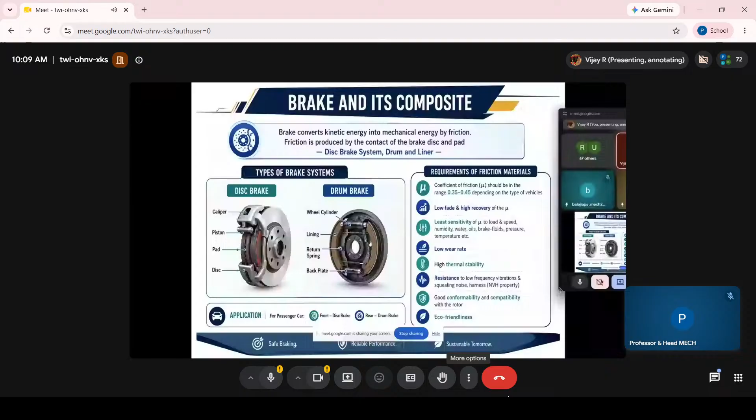Thank you sir. Global friction composite market, I was saying about, now going into the marketing point of view, maybe some guys from MBA or management will think in a different perspective whether this market will have scope in the future. Now I will come with the predictions done by Mordor Intelligence. This report is from Mordor Intelligence, where the automotive brake pad market currently is universal, that's global. We are now at USD 4.57 billion expected as the market, and by 2031, with the compounded annual growth rate, it seems to be USD 5.87 billion.

If you see the growth rate by region, mostly it is Asia Pacific where the concentration is very, very high. That is, we own more automobiles.

We often change our brake pads after service life. This travels cars and all, they will change brake pads very often because they reach the service life soon, while passenger cars we hold at home will not change very often. Maybe 1 or 2 services after that we will change, not often.

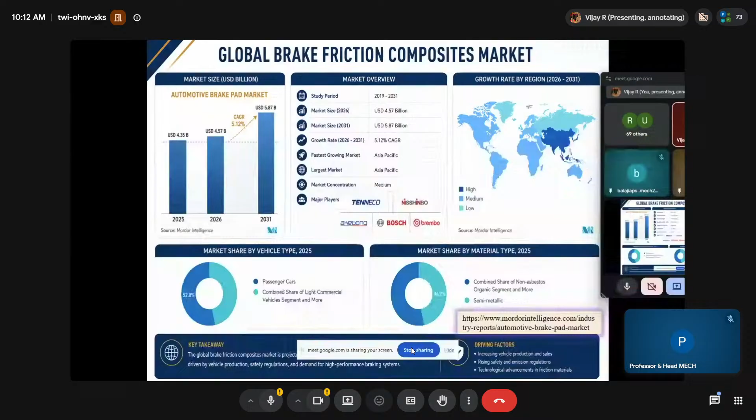This 3 to 7 is not for all the things - EV will have 3 and some will have 7, like that it varies. That 7 mg is not only brake pad, it is a combination of 3 materials. You have to wonder how 3 mg - this 3 mg, if you see, no pad, then it's going to be disc or drum, followed by tire. Tire is going to be the biggest problem for tire manufacturers, they have to focus much on wear reduction to cater to these regulations.

So, journey of brake friction materials. As I said, when Henry Ford was finding out, there were only drum brake systems. That drum brake system was previously used in our cart shafts, like we used to say, horse carts. They had a brake made of riveted leather, then cork, and some metallic strips, to stop the vehicle because the wheel rim was metallic material.

Even asbestos was used when they came up in the 1960s and 70s. Asbestos was used directly in the formation. Now we are in the current era, the 21st century, where we are mainly focused on disc brake systems and drum brake systems. Of course, I say drum is not completely gone. So in that we have 4 main categories: semi-metallic, low metallic, ceramic, and...

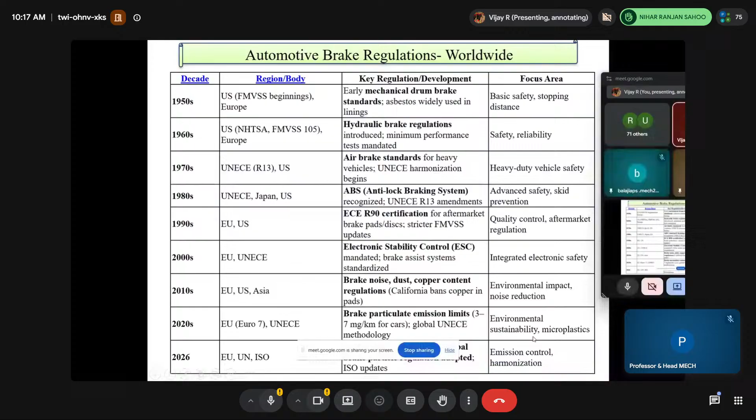In the previous slide I did not say much because the name is self-explanatory, where this was there, why lightweight, what happened, what were the problems - all was given in the previous slide. Now it is the present era we are in this thing.

Semi-metallic will have steel, iron, copper, graphite and other fillers. These fillers - what are the fillers, binders, fibers, and everything - will be given in the next slide, how it is categorized. So what it is done for, what is the purpose, where it is used, cost economically, advantages and its own properties.

Next one, as I said, to reduce the sound, we go for quieter operation with low metallic. So for low metallic, we need to have good wear and friction resistance also. That is done by this low metallic type.

Well, ceramic is for high-speed cars, but the bonding, fillers, everything will be there. It's a quieter operation. For example, we can say BMW, Audi, Porsche, and Jaguar Land Rover will have good ceramic-based brake pads. It's called elite pads. Simply put, excellent comfort and wear resistance. But if you see the cost, it will be like gold cost, thrice or 4 times higher than the pads which we are seeing.

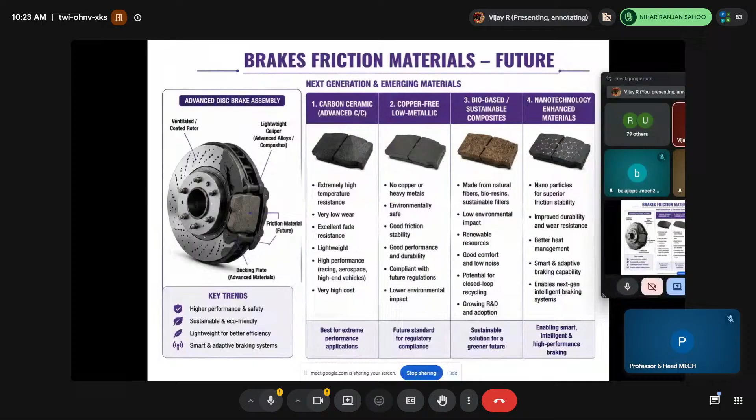Low semi-metallic, low steel with non-asbestos organic, and it will have low steel. If it's low steel, there will be metallic materials with some percentage of steel. If it's not low steel, it means they will have metallic material, but not steel - it may be some other material.

So this is the overview of the types of friction material currently available: semi-metallic, low steel, NAO, low steel and metallic, and semi-metallic ceramic. As I explained in the previous slide, this just gives the applications and where it is used.

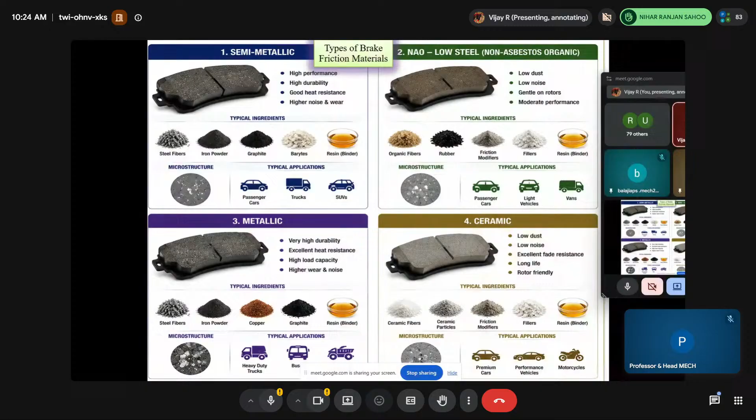So we've covered friction materials. I hope the slide is moving to brake friction composite ingredients.

Arvind sir, can you please confirm it? Yes sir, yes sir, yes sir.

Thank you. So brake friction ingredients are mainly classified under four main categories: fibers, binders, fillers, and frictional modifiers.

We all know what a fiber is. Fiber is nothing but a reinforcement to withstand the structural integrity. So our friction formulation will have 10 to 15 ingredients.

This is the formulator's strategy of what they will use. Formulation is just like a black science, we used to say, because everyone will have a different strategy to make a formulation. It's just like making coffee at Cafe Coffee Day, where the same ingredients - milk, everything - is being used.

The coffee powder or chocolate or something is common, but the person doing the combination plays a vital role. A Cafe Coffee Day at Avadi will have a slightly different taste sometimes - not much, I don't say they vary much, but slightly it may happen.

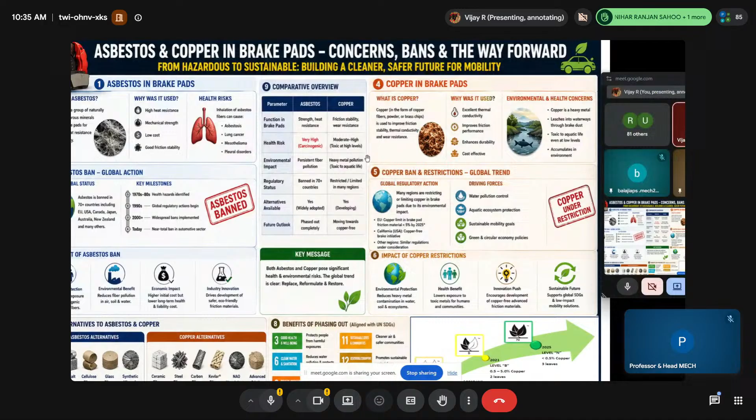They have restricted copper usage, and at the bottom you can see how the copper usage is reduced. By 2025 it should be 5%, in 2021 it's 0.5 to 5%, and by 2025 it should be less than 0.5%.

This is again a geopolitical thing we have to consider. If we look at India or Asian countries, they will use copper, saying we need copper for dissipating heat and everything. Not all, but some people do this. But European or American studies will say don't use it. It depends—there are some studies which use copper, some which restrict it, and some which eradicate the usage of copper entirely.

So copper alternatives are given here, like NAO, non-asbestos organic formulations. There's a specific formulation for it, and they change the formulation accordingly.

Next we will go to the binders. As I said, a binder is used for binding the ingredients together. One is the phenolic resin—a straight phenolic resin with some OH bonds. This is the typical composition.

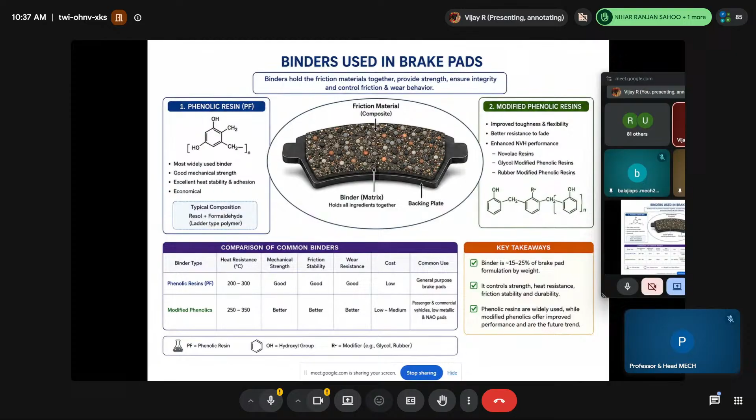There are also modified phenolic resins, like rubber modified, novolac resin, glycol modified, and epoxy modified—these are cheaper. We can't buy everything premium, like from a general store. So both straight and modified resins are used universally by formulators, depending on the application, the request, and the conditions it has to work under. It's not a single factor, it's multiple factors.

Now the future of binders—this is a research area people can focus on. The first is the evolution of the roadmap, shown at the bottom. First is phenolic resin and advanced phenolic, how it's evolving. Now engineering is putting in nanomaterials—they're planning and working on CNT, graphene, and nanoclay-based binders for higher strength formulations.

Then eco-friendly binders like CNSL-based and other recycled polymers are used. But recycled thermoplastics are not generally used in commercial automobile brake pads—they're used in some low-temperature applications and brake pads for non-automobile purposes.

Then self-healing binders and damage-sensing binders are being developed—it's a smart, intelligent binder. I'm not going too deep into this because it's mostly theoretical and not fully realized in practice yet.

Multi-phase combinations are also being explored: phenolic plus epoxy, phenolic plus rubber, epoxy plus ceramic—meaning epoxy, ceramic, and phenolic together, along with polymer and nanofillers. Multi-phase systems are in the picture, and there are many ongoing studies which can be a good pathway for future research.

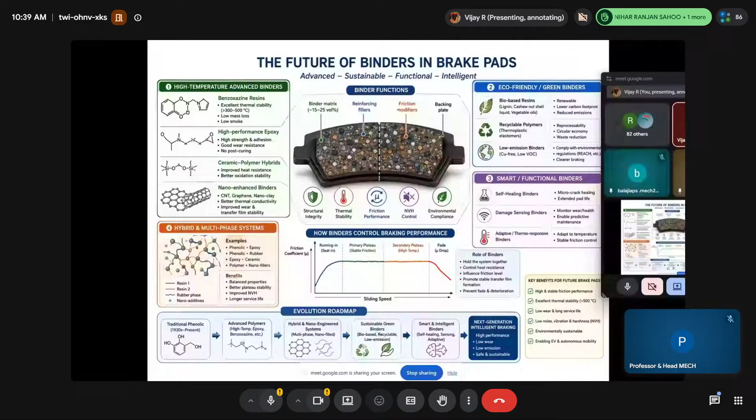Right, Dr. Arvind sir. Can anyone say where inert and functional fillers are used in brake pads, please? Yes, sir, thank you, thank you.

Abrasives and solid lubricants, as I mentioned, relate to lubrication. Some people ask if lubricant is for reducing friction. Yes, it reduces, but more importantly it stabilizes—it reduces frictional fluctuation, which is stabilizing.

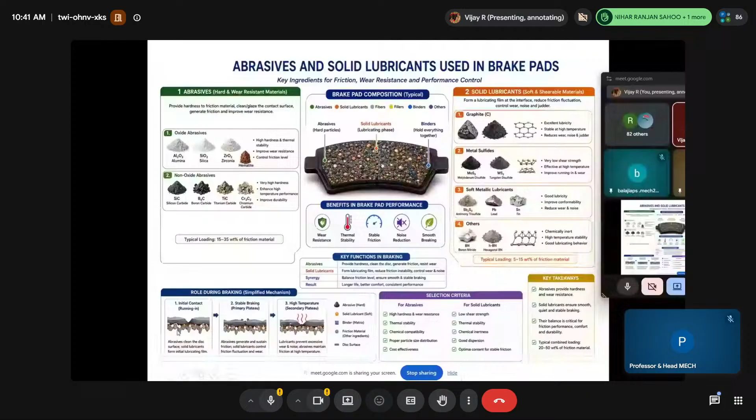So now comes the main feature of current hot topic, which is the biggest problem next to copper and asbestos. Asbestos is gone, nothing. Copper is in pathway. Now a new day has come. It's called antimony trisulfide, a geopolitically driven, health concern based, environmental concern based material.

Environmental concern, toxicity to life, heavy metal concentration. You see fishes, sometimes they say lead is affected, arsenic is affected in our fish while eating it. Our marine studies will say that. Supply chain, geopolitically, we had some issues with certain states. That was not a big concern before, but some countries would geopolitically hold this material and stop the supply chain.

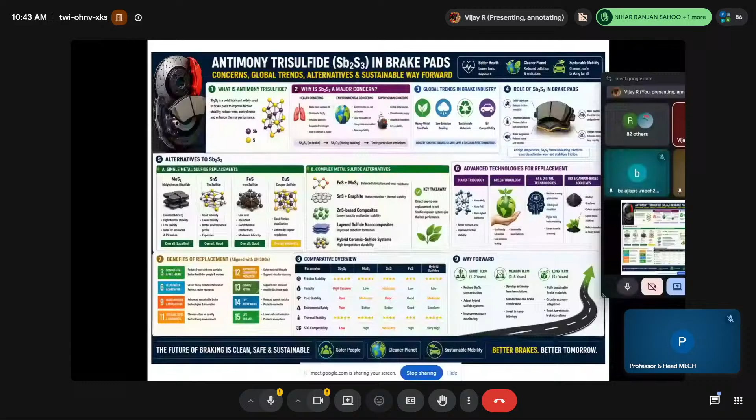So how it will align with the SDG goals is given here, because our future will be based on the SDG goals, Sustainable Development Goals of the UN. Sustainability, as I was saying previously, this is going to be the path - sustainable breakdowns, life cycle assessment, how to reduce carbon footprint.

So sustainable natural fiber, plant-based fillers, recycling carbon, bioresin, low impact additives. Because impact in the sense, for some additives we go for more intensive mining, open earth mining or underground mining, which will have a bad impact on the land.

So rather than that, some abrasives can be used, recycled abrasives or something that can be used. Metal recycling is a good thing which we can try because metallic fibers are used, some scraps can be reused so that the reduction in filling landfills can be prevented.

Sustainable manufacturing - as we know, solar and waste reduction, recycling, this can get into the picture. Those researchers who are working on sustainability and life cycle assessment can focus on this topic and get a good picture about the future.

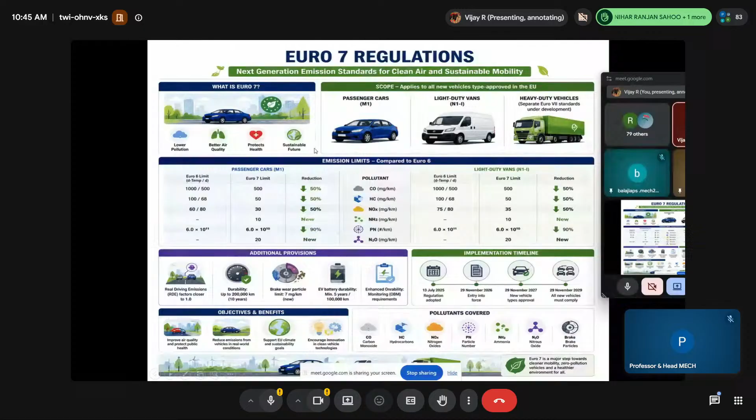So Euro 7 regulations, as I said, how it's going to happen, what it is going to do, how many grams will be reduced. Euro 7 addresses PM 2.5, PM 10 particulate emissions, and what pollutants are combined. It's just an overview - you can get it from any open sources.

So now comes the manufacturing of brake pads. The first one is a plough shear mixer, followed by preforming and curing, post-curing, and finishing. This is going to be the picture of the whole process.

So first one is the mixing process. I am just focusing on the current era of dry mixing process and dry materials only. We are not using any wet mixture or wet combination in any formulation in the current era - that era stopped in 2010 itself. We are not now focusing on any liquid resins or liquid materials. The wet mix formulation is a completely different process which has been eradicated in many manufacturing setups.

Plough shear mixer is where powdery ingredients, flaky ingredients, materials and fibers, fillers will be put, and at the end, they will use binders to mix.

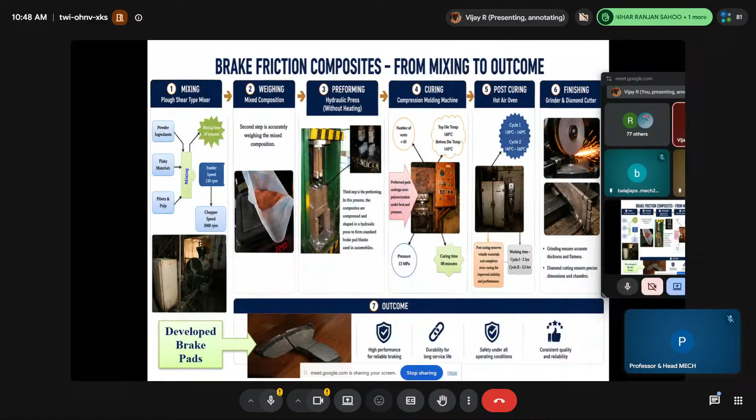Finishing will be done by grinding and using a diamond cutter. If they ask for putting a center cut, they will put a center cut. This is the pad you are seeing as the outcome.

So, characterization of friction materials, which is an overview, is given here. We will be using all the standards which are compliant with IS, JASO - India I'm saying - even SAE standards compatible will be used.

Based on the customer requirement, based on the quality issues, quality we have to address. Rather than that, our Indian standard, internal standards, customer specific standards, everything will be there. Then it's always dependent on the request of the customer, or generally, as an academic study, these are the tests which can generally be made.

Thermal characterization, we need not have this much. Loss on ignition is sufficient, okay. And water swell and heat swell can be eradicated if you want.

Tribological characterization also you can investigate. Pin on disk or chase test is enough. Inertia brake dynamometer, if you are going, well and good, but it's not there - okay, fine, academically. For quality, industry will go till chase, they will not go for pin on disk because surface area of contact is very less.

This is good. So high temperature, temperature variation and pressure variation can be studied by chase test, but pin on disk - very small sample - though you vary the speed and something, it will never even come to the RPM it is running at.

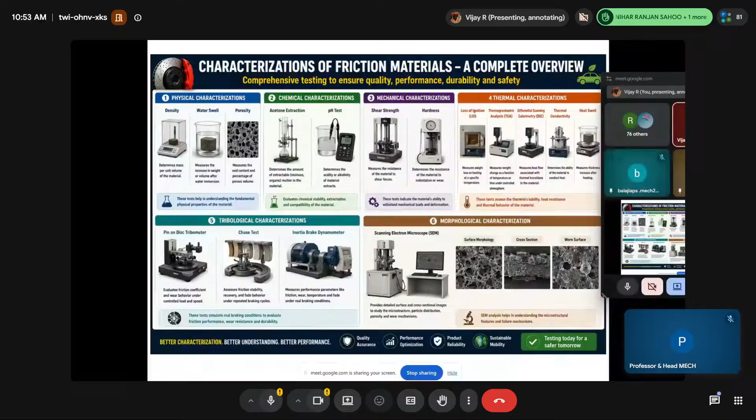So the studies I mentioned - physical characterization, density - the method of how they will do it is all given here. The heat swell test is based on IS 2742 Part 3 standard, where a 10 into 10 into 10 mm sample is placed at 200 degrees for 40 minutes, and they calculate it in a muffle furnace.

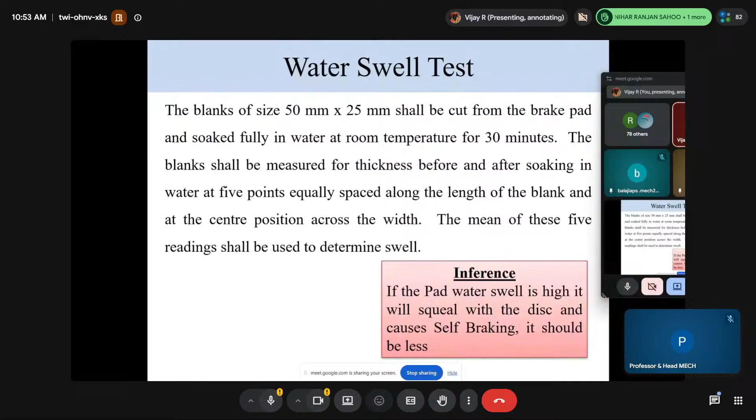Then water swell: cut a pad of 50 into 25, soak it for 30 minutes, and then measure it. So for porosity, kindly know it is not internal porosity, it is surface porosity.

People may say, sir, porosity is a void. Void means the material is failing. Yes, the material is failing. I am referring to surface porosity, not internal porosity.

Surface porosity is measured by JIS D 4418 study, while internal porosity has a tapping method and some other NDT method. If that does not pass, the pad is thrown out without any mercy. So then these studies will be done.

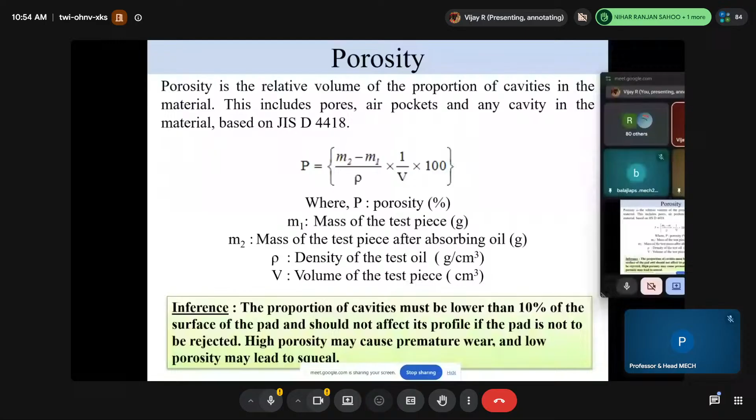Chemical characterization: acetone extraction is used to measure the uncured resin. I hope the slide is moving to acetone extraction. Anyone please? Yes sir, it is moving. Thank you. So pH test, because pH is the culprit which will create a problem of corrosion.

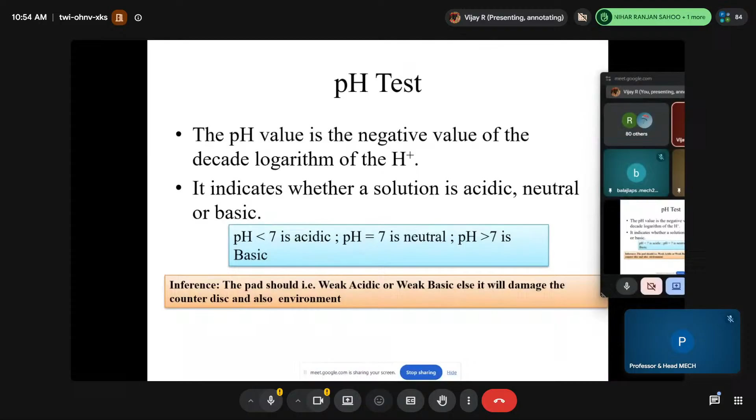How acidic, how weak base, everything - this is the procedure. Nowadays they are not using this litmus paper method directly. They are using pH meters also. The procedure is entirely different, and it is customer specific and industry specific. It is all based on the requirements.

Shear strength as per ISO 6312 - how the pad will have the shear value, how it will hold when subjected to cyclic stress conditions and all.

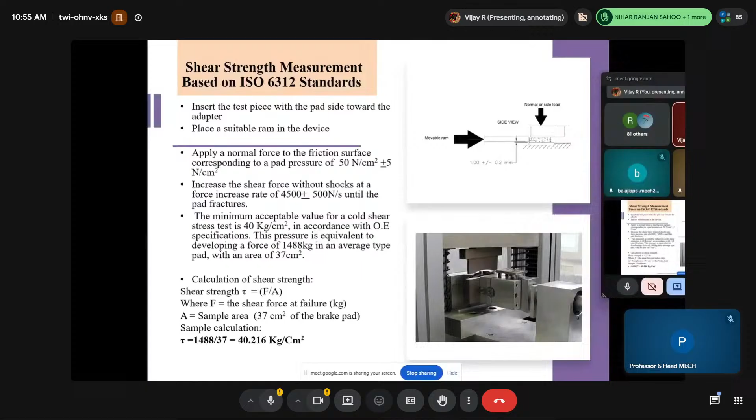It's given here. Hardness - generally two hardness scales are taken, R scale and K scale. If it's a highly hard material, it is K scale. If it is soft, like any one, it's R scale. Then this hardness is measured as per the standard procedure given in IS 2742 part.

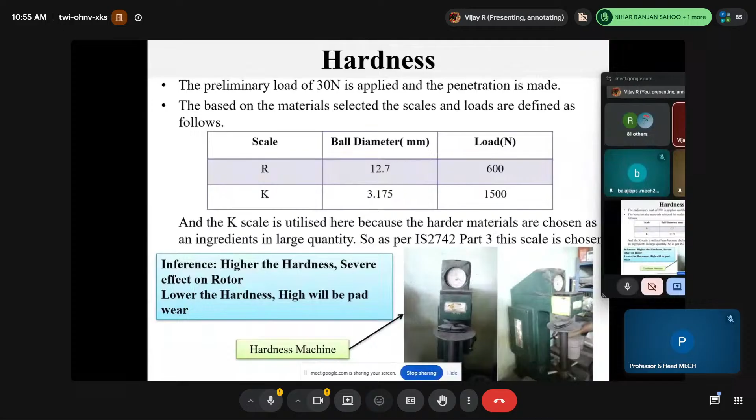Loss on ignition: 1 gram shall be weighed at 800 degrees Celsius in a muffle furnace. Thermogravimetric analysis shows how much fade and what is happening during the 150 to 400 degrees Celsius range.

And the differential scanning calorimeter also gives an idea about what reaction is happening, what is the direct melting, what is the glass transition.

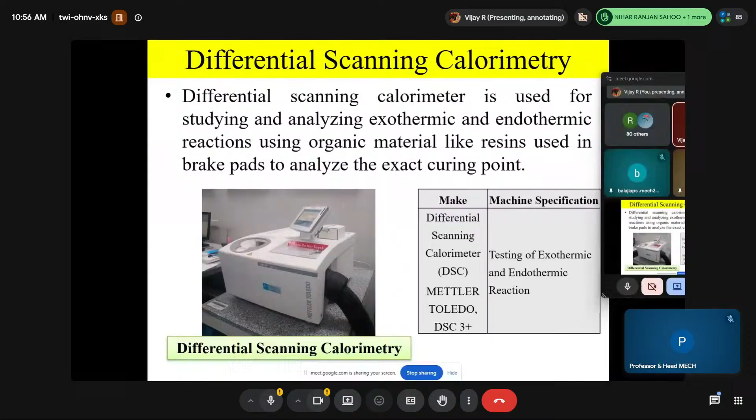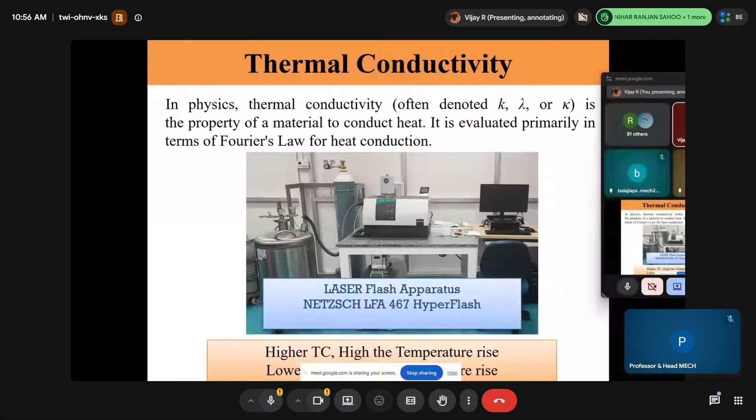Thermal conductivity - this is a laser flash apparatus used for measuring it, based on Fourier's law of heat conduction. So they will measure how much thermal conductivity is there, and based on the thermal conductivity, how much the interface temperature is high.

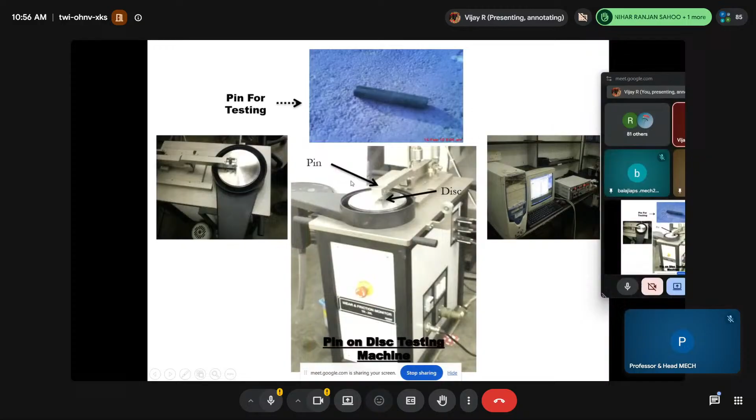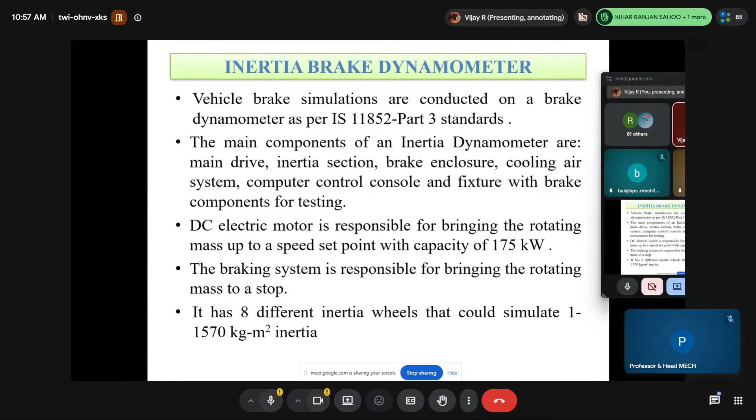We examine the test - I said in the morning we keep it. After rain, if we come and keep it at the vehicle parking for 2 days or 1 day, what will happen?

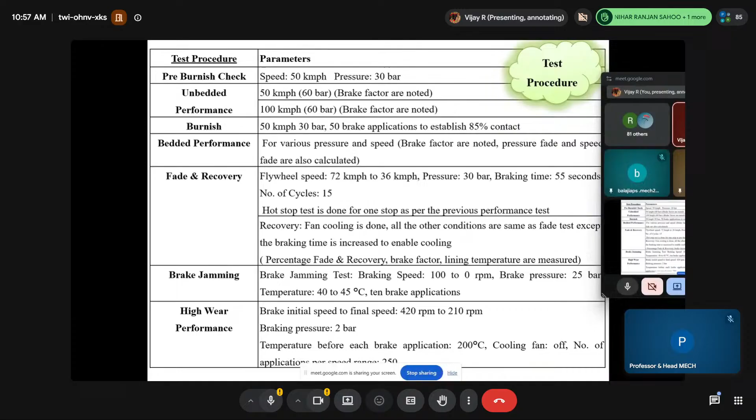Effectiveness study will be measured, and this is the dynamometer.

So morphological characterization on the dynamometer is tested. We will study the surface of that tested pad. What are the main wear mechanisms that have taken place? Adhesion, abrasion, delamination, oxidation, everything. It's a cocktail of wear mechanisms, not a single predominant mechanism.

So primary plateau, secondary plateau, how this is formed, how the early stage wear will happen, plateau formation, what is that, will stabilize, excessive wear means what will happen. Then what is the primary plateau, secondary plateau, all these will happen. You can refer my previously published PhD papers to get an idea.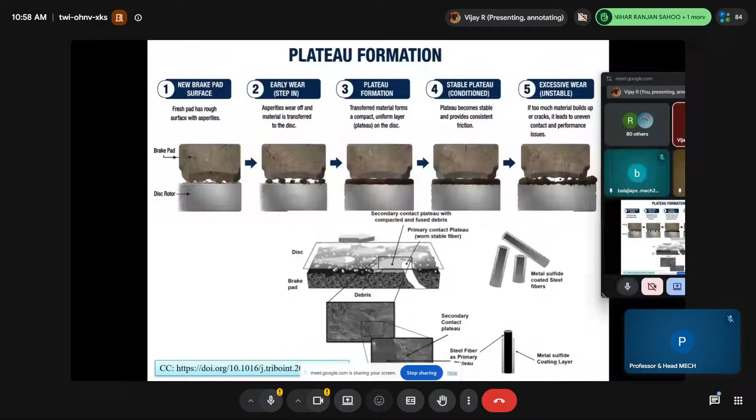The copy is easy. So now I will go on to the case studies in brake friction material which I have done in my PhD and in my postdoc. This is fully my academic study. So first one I have done for liner using a stainless steel fiber as a replacement for steel fiber, which was mainly for corrosion properties.

So that time I tried with one top moving, what to say, utility vehicle, where I tried with the formulation. This is the steel fiber and stainless steel fiber I brought from one of the Indian suppliers. So we have tested it and how it is there, properties, everything is given here. Then if you see, these are the standards, so test procedure and these results are given.

So I have given the average, I will test 5 to 6, 5 tests minimum, and I will put the average here. The range alone for hardness, why I have put it, is around 10 values, so I have put it as a range and not put individual values, other things I have put as an average. Thermal conductivity, coefficient of friction, only 2 times, not much. I will not say that I have done it 5 times or 3 times, that is costly and I will not do it because that will not have more impact.

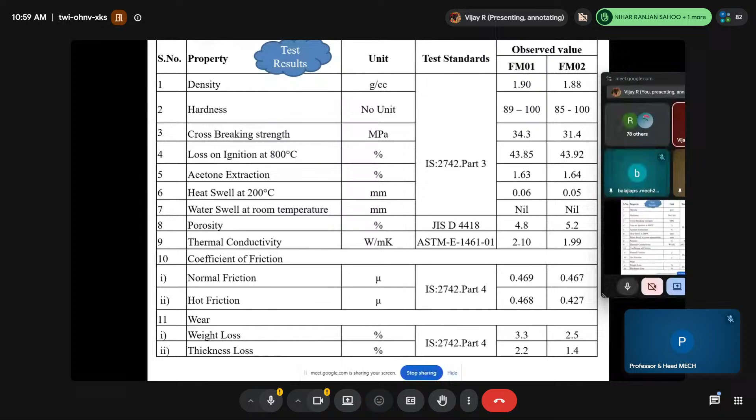So brake liner or not, we will do it with various speed and conditions. FM01 is steel based one and FM02 is the stainless steel based one. Undulations is lesser in the case of FM02 when compared to FM01.

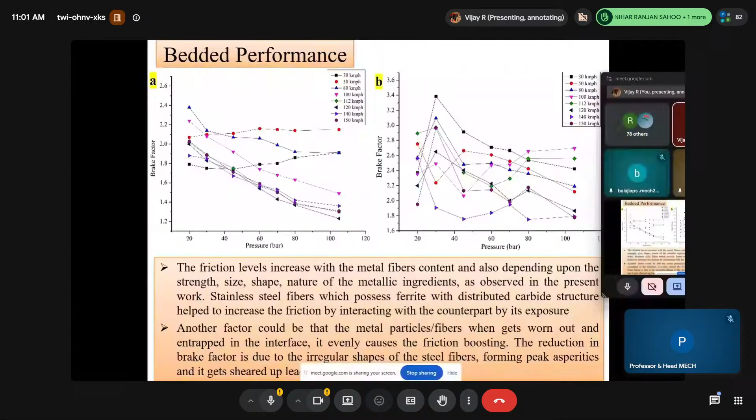Bedded performance after certain application, around 400 applications, like our vehicle we will put the brake, start, brake, start, brake, start, like that, 400 applications, after that there is a bedded performance. So it's all given in the value, what is the undulations, everything, all the details are given.

And fade and recovery process, FM01 and FM02 steel fibers, what is there, how much it has faded, and what is the brake factor value, everything. In the case of stainless steel fiber, this is zero.

So for all these you can refer my PhD paper, because in the overview you will not get the idea. I have given all the theories, everything in my PhD paper. For this one I got best article award.

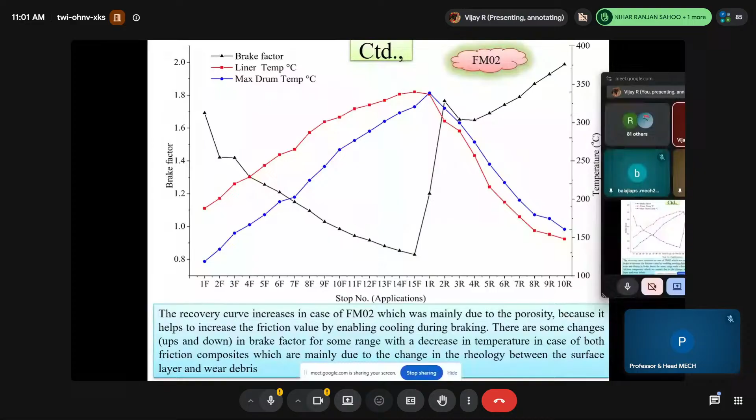So overview is that fade, how much it is calculated. Negative fade is not at all basic. Negative fade means it will definitely cause squeal, because we are very well known that the steel will cause squeal because this steel is a culprit, will form what is that, corrosion and the steel squeals or everything. Then this guy has to be carefully handled.

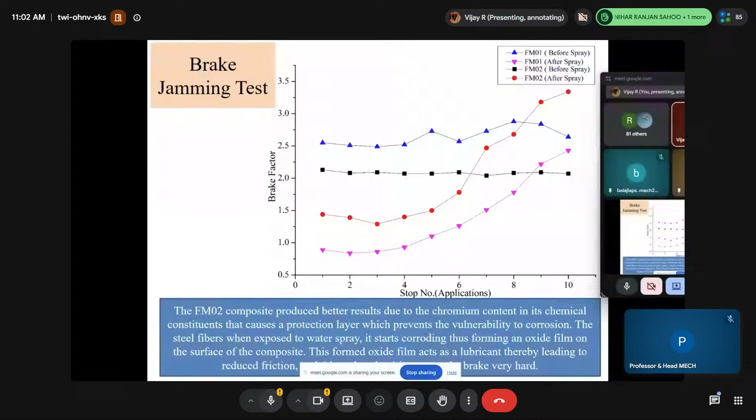So we do a brake jamming test in the morning. I'll spray it and keep it for a while and see how it has happened. You get an idea on the brake jamming test.

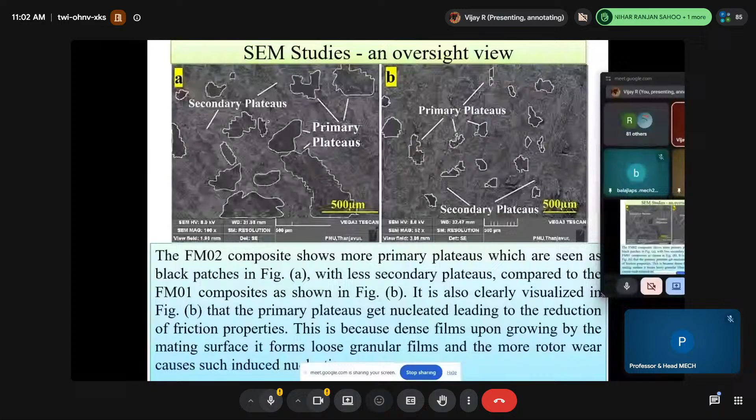Wear characteristics at higher temperature, at different temperature and speed conditions - this is the overview. The primary plateau is mainly made of thermally stable material, while the secondary plateau is made of silvery patches. These are made of less thermally stable material. So this is the overview.

I can say that FM02, the stainless steel fiber based one, was good in the case of corrosion, but for performance and with no brake jamming, cost-wise it is the same. Steel fiber is 2 times lesser when compared to stainless steel fiber. That is also very important in the case of the commercial one.

Academic research does not in any way depend on your money or usage. Your research, if it's going to be R&D, if it's going to be academic, don't ever, never focus on cost. Some people will come up with a good point that, oh, what is this - this steel fiber is very less costly while the stainless steel fiber is costlier, how can it be commercially viable? Commercially viable is not the researcher's point of view. While finding, you have to be...

I will just give an instance. We all know the pharma industry. In pharma industries, how much percentage of formulations get accepted? Can anyone say the number, please, a rough number? This is open to the forum. Can you say how much percentage of trials gets accepted despite many trials? Roughly, any percentage? Audience, please.

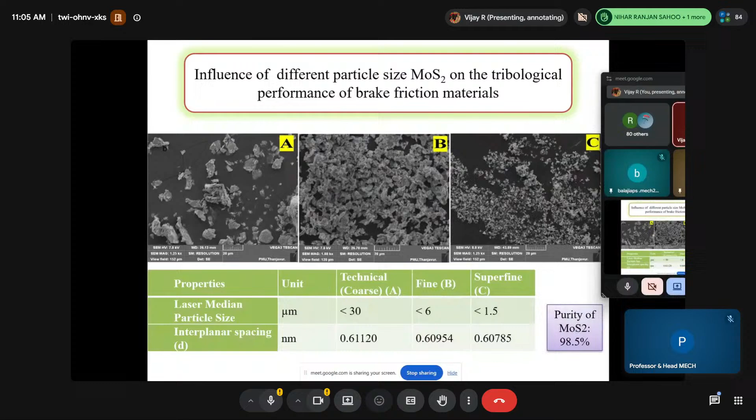So molybdenum disulfide, we studied with various particle sizes during the PhD. During that, we used coarse, fine, and superfine grades. We studied with the formulation, using around 6%.

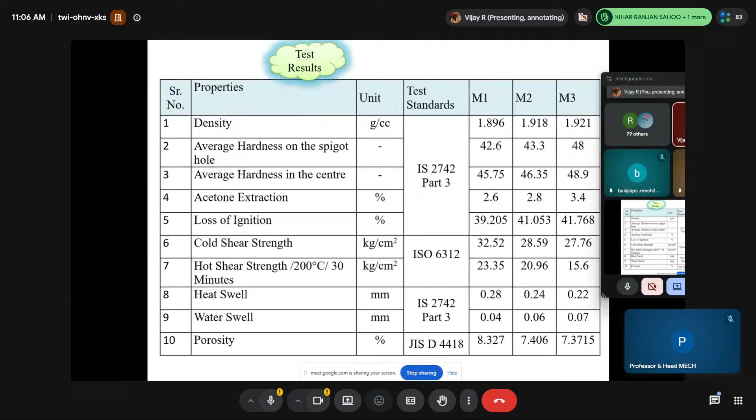Density will measure everything as per IS 2742 Part 3 standards, including hot shear, cold shear, and porosity. I did all this for my own interest, but it doesn't mean you need to do all these 10 tests - 4 or 5 is maximum. Density, hardness, acetone extraction, and porosity are much more important. You can add loss of ignition if you wish, but it's not much important.

For tribological characterization, I did it in Chase following IS 2742 Part 4 standards, covering friction formulation and what is the mu normal. Mu normal is at normal ambient condition - what is the friction value, 150 applications, what will happen. If it's hot, at higher temperature fade cycles, it is happening. Fade cycle goes till 300 degrees Celsius, then recovery is from 300 down to normal temperature.

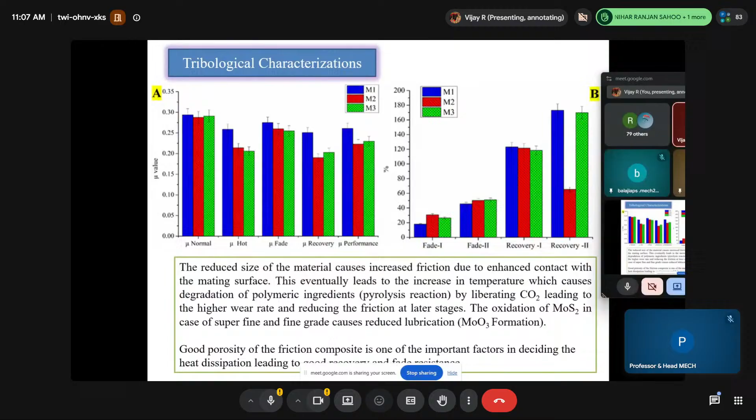They come back to normal temperature, then recovery rate - what is going to be the overall performance. Based on those values, we calculate the fade and recovery. We have seen that the coarser material performed good, because it was able to form good lubrication - the shear values were all good. As I said previously, the coarse spacing was good for shearing the lubricants and liquid components.

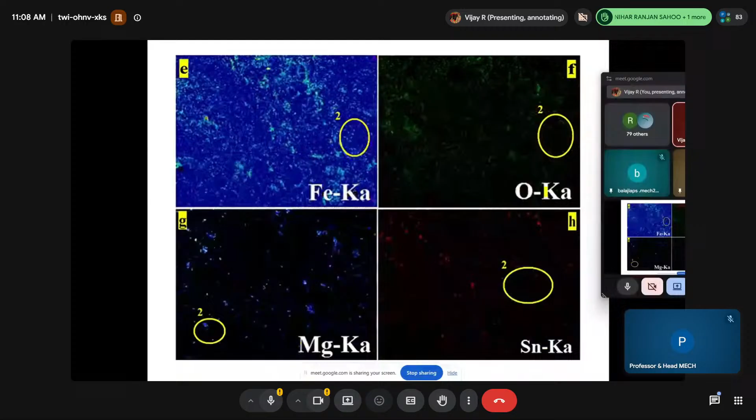These are the same studies where the wear debris analysis is done, to map what happened during back transfer, whether any iron particles or something took place. We made a study analyzing 3D profiles, and these are the values we got.

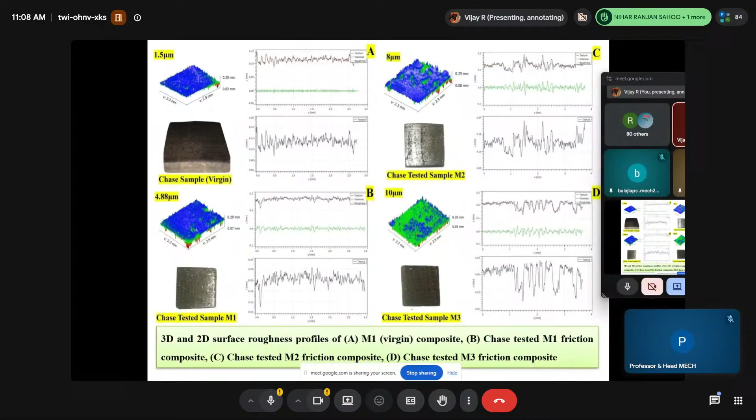In the case of B, that's M1, the undulation is very less. M2 it has increased, but in M3 undulation was very high because it was not lubricating very much - stable friction was not there, so undulation was at peak. This is given in the conclusion.

I can say that M1 friction composite, coarse-sized molybdenum disulfide, would be a positive size. For various cashew friction dust, we will see the conventional materials - the cashew friction dust we got from one supplier from China.

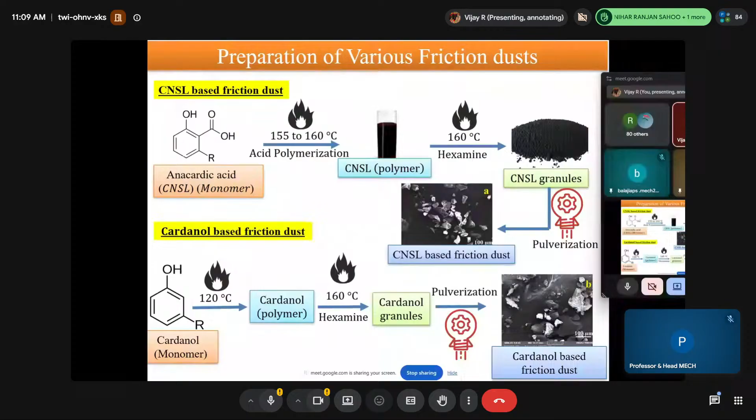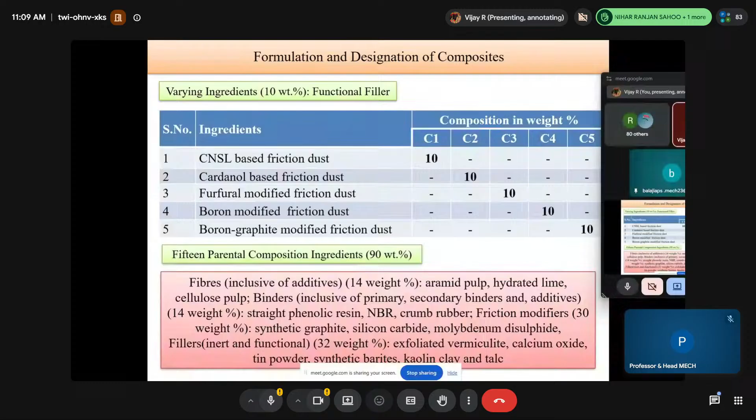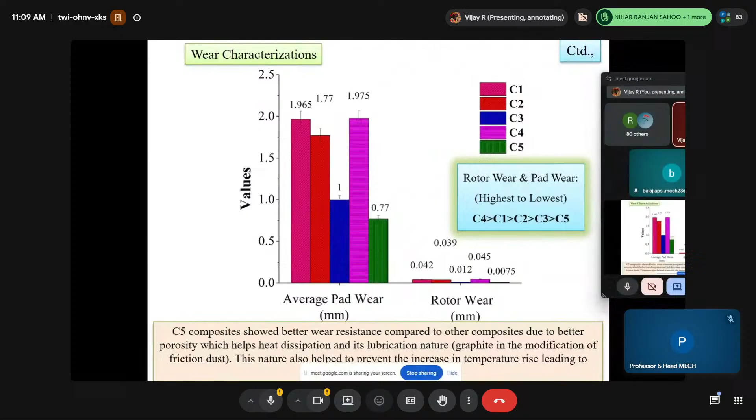So how this anacardic acid polymerization happens, how it will tumble, everything is given here. We studied 5 grades - one is CNSL, cashew nut shell liquid polymer, and cardanol based, furfural modified, boron modified, boron graphite. These are the results. Boron graphite modified was getting good results because it has both thermally stable boron as well as lubricating graphite.

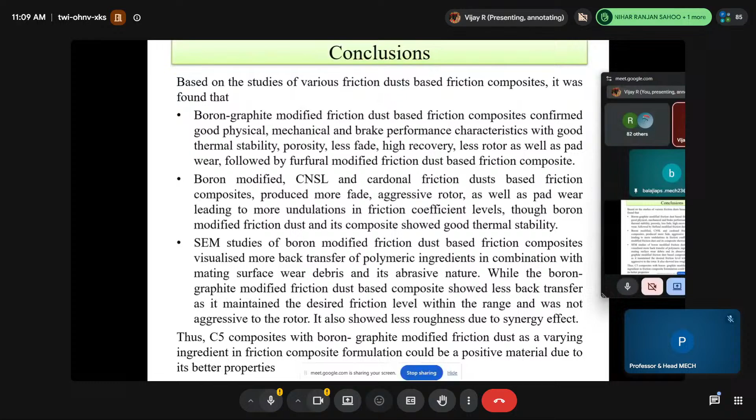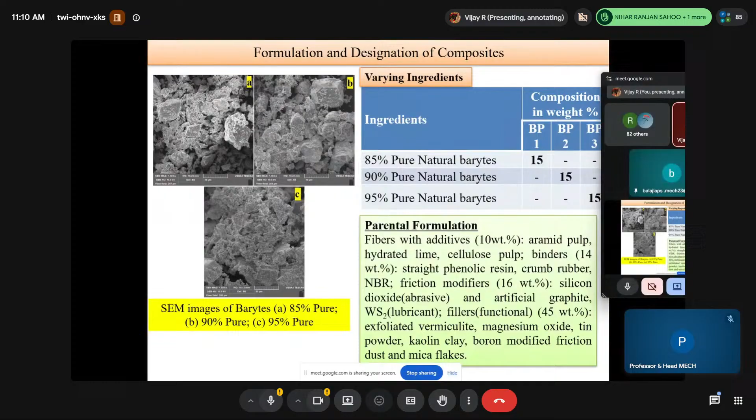Next we went for fillers, which are pure natural barytes from various purity levels. The purity we got from 3 different mines - 85, 90 and 95. This is natural barytes, what happened, how it performed. They have done a dynamometer study for all this, following JASO C406, so based on those results.

The high purity material, we all know this will be good, but never ever assume that in the future - your postulates may fail many times in this friction. Example, one postulate I could say: higher hardness is lower wear, higher wear resistance - definitely it will not happen. It will become a different area.

See, brake friction is defined as dynamic and aperiodic in nature. What to say - it is agaradi. In Tamil we used to say it's agaradi. We cannot put this guy in a box - this guy will do whatever he wants in the field. So this is all the field, you can say.

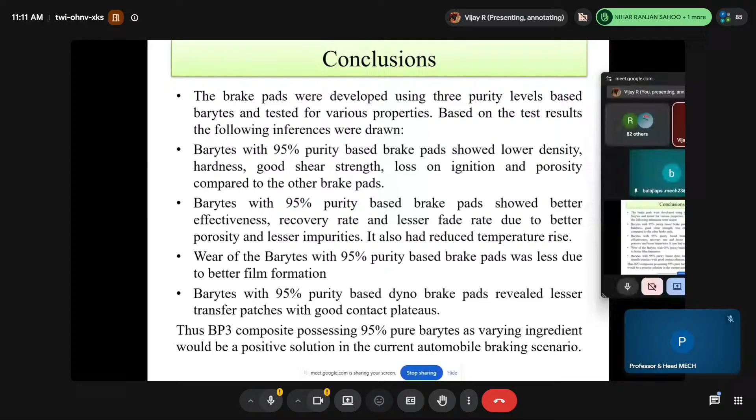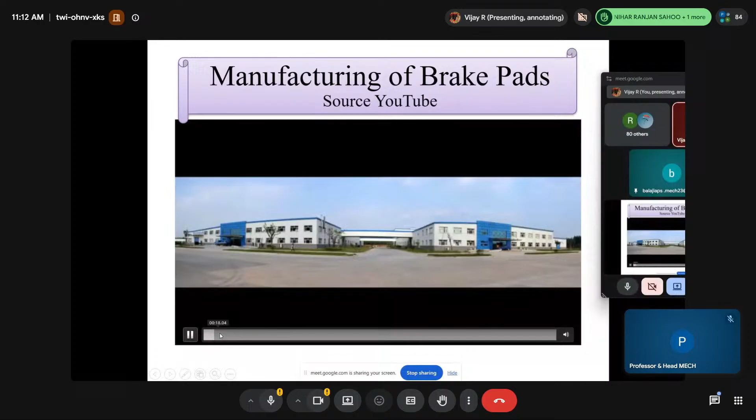Now we will just see a YouTube video on how the manufacturing will happen. I hope you can see the manufacturing of brake pads slide. This is the source from YouTube. This is all I will run through - this is the shop floor.

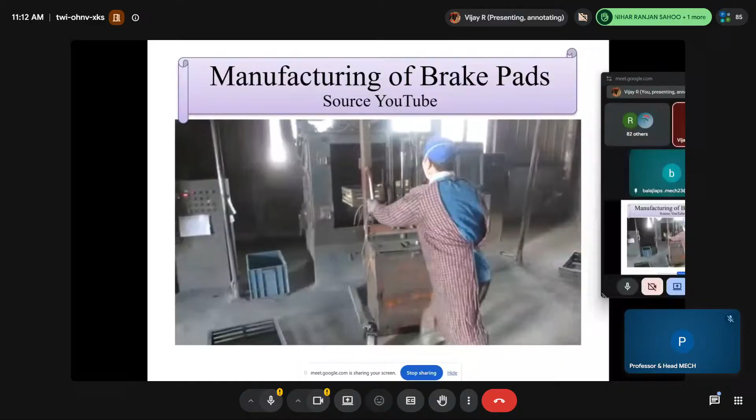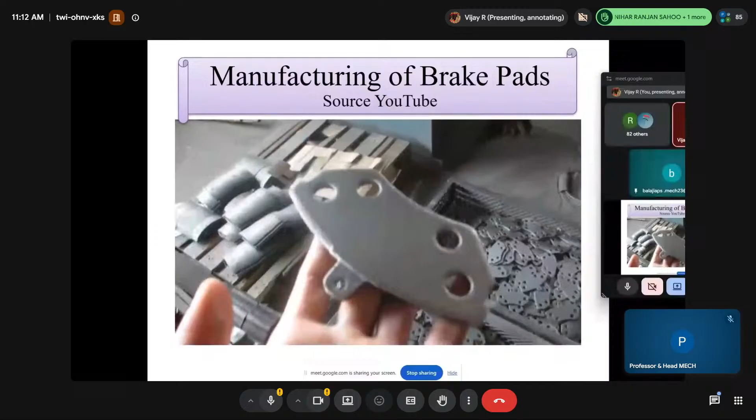So shot blasting is the process used for the brake backplate material - the piston material which the piston will slide against. So there they will be using shot blasting - they will put the shot blasting material, it will roll and come down. Then they will apply the adhesive glue. This is the shot blasted one to remove grit, and then do ultrasonic cleaning to remove any grit particles remaining.

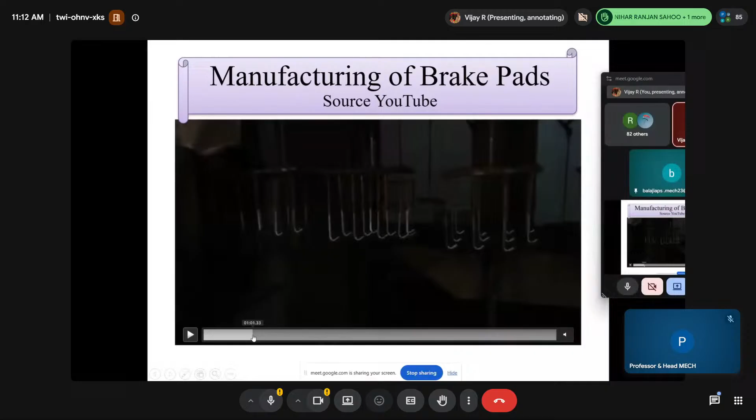Then they will spread the glue. The glue conveyor will put it through and it goes at 4 to 5 RPM, rotating and moving. It will be fast, and once it goes inside, it will be very slow, very slow, very slow - you will glue it, heat it, and it comes out.

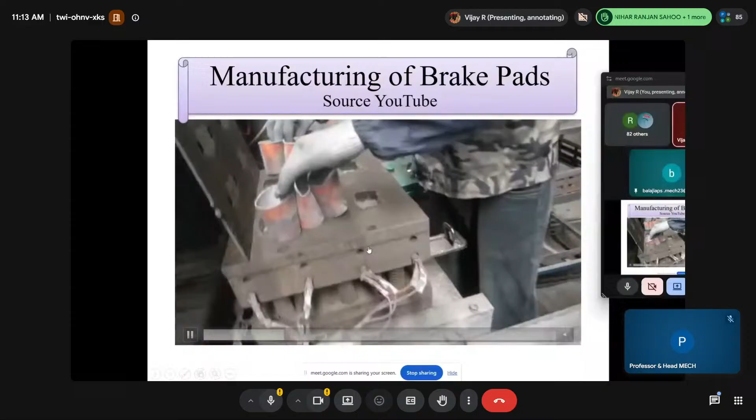Once that is done, they will make up the pad - this is a direct fill process, there is no preforming. They will put this in the molding machine, level it with hand - but generally we will not level it with hand, we will have some leveling tools like scoops or something. We will put the back plate and do the compression molding.

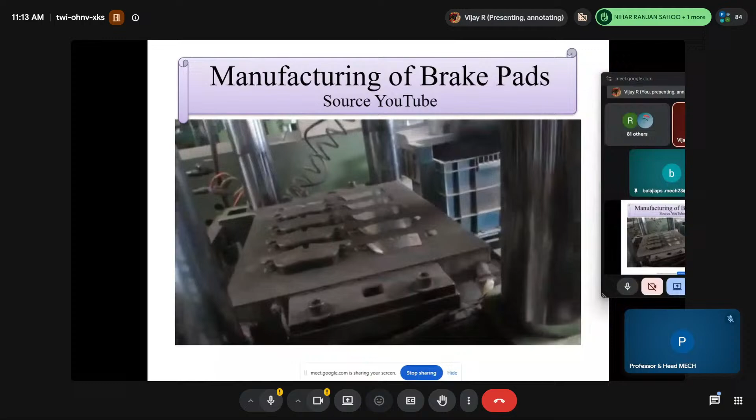So this is how they will put the pad through the weighing process - they will get an idea from weighing. Then the compression molded pads are there - they will apply pressure, then temperature, pressure, then breathing cycles, everything.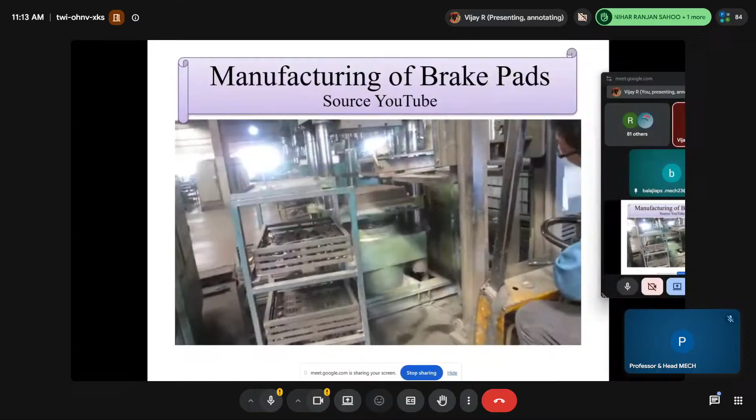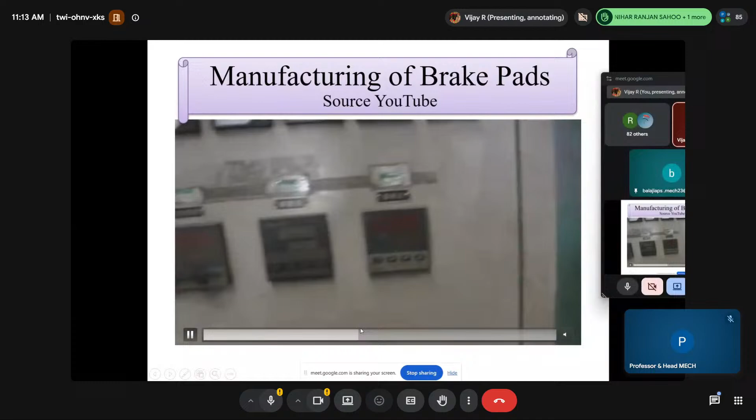The process for this heat treatment is the post-curing process, where post-curing will remove the residual stresses and some volatile materials. This will be a big hot air oven running with a step baking process, with different temperatures from 140 to 160 in the ramp up.

Spray paint is for aesthetic looks, which is not done in academics actually, but industry will do it.

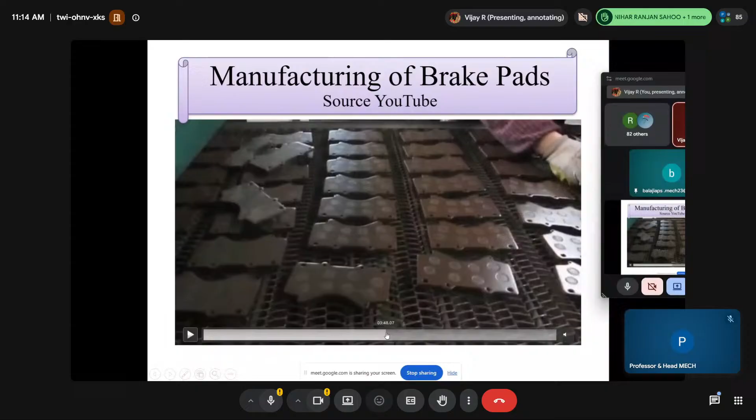If you want to have chamfering or slotting and something, a grinding process they will use. This they have done chamfering. Center cut and chamfer they have for noise reduction and wear debris removal.

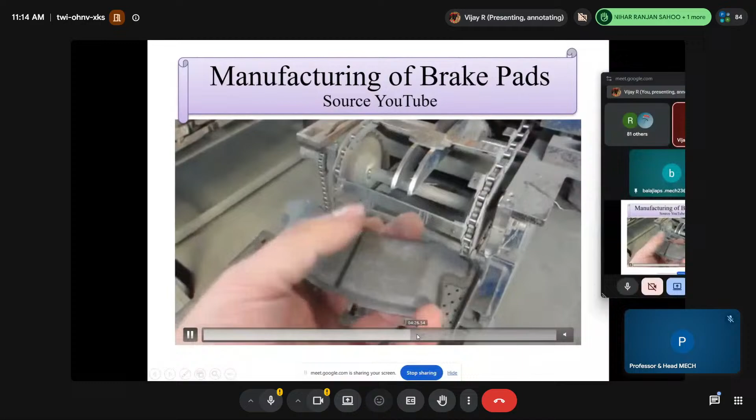This is shim bonding. Shim bonding will be for some supplier. They will ask for shim for reducing the noise, the backing plate, and preventing the noise from getting propelled. It depends on the customer, and wear indicator clips or everything is there.

Then they will put into the grinding process. Center cut. Then they are doing grinding.

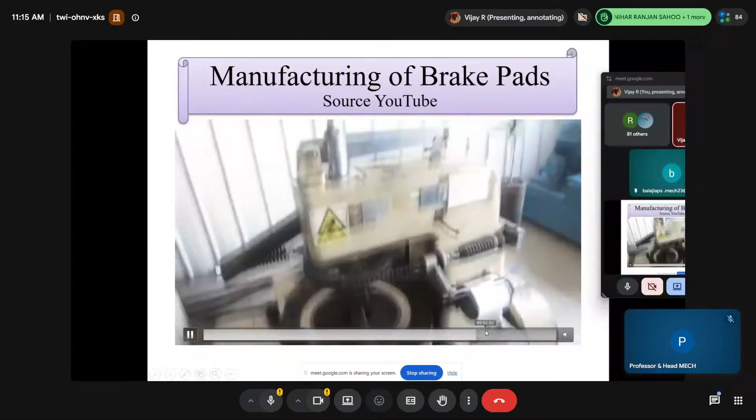Now the product testing, I said, so they will do shear testing. This is a shear testing process. Then hardness, they will measure the hardness. Then compressibility. This is an indigenous friction test which they have.

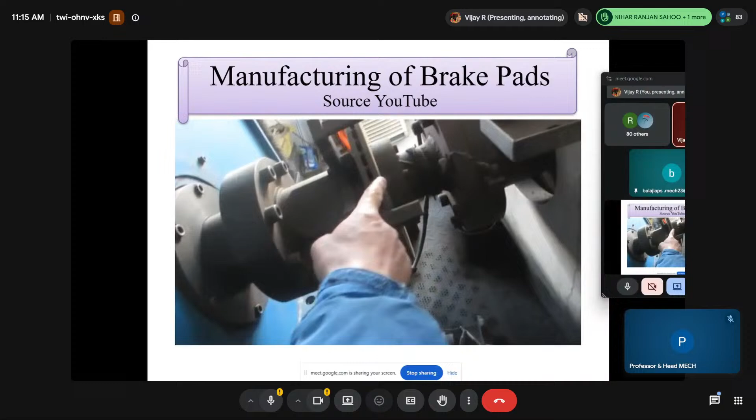This is a chase test machine. This is the sample what we showed. This is going to be the inertia brake dynamometer machine.

This is all the commercial logo and packing, everything. So this is the thing.

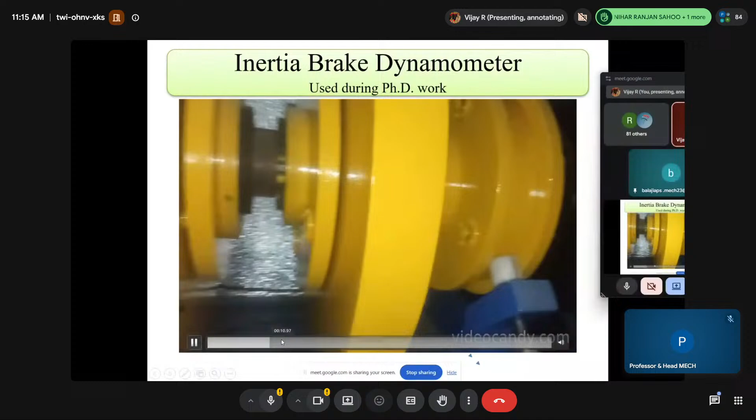This was used in my PhD. During my PhD, the installation happened. So this inertia means everything. Here we will load the disc and the pad caliper systems, and all those machines will be inside.

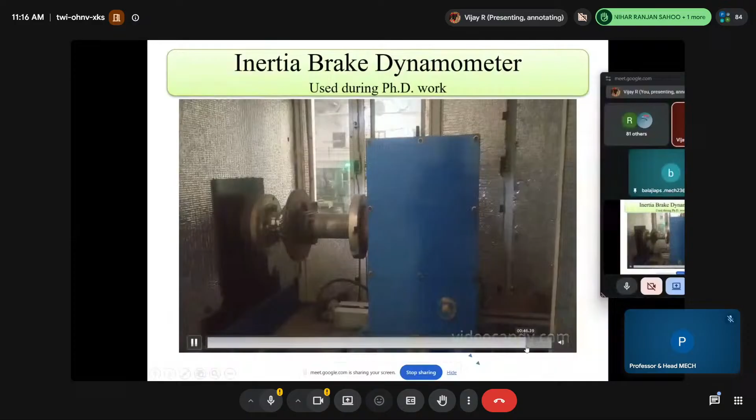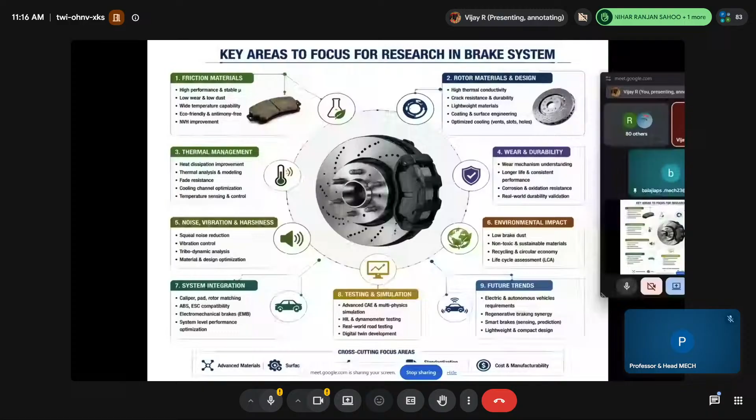So now this is the period of electrical vehicles. Now the people will come. So electrical vehicle, regenerative braking, no problem.

The conventional brake pad, nothing will be removed. First, in a high-speed emergency situation, regenerative braking will not provide the braking force. There you need the conventional brake pads. Maybe the service life or the time to time changing, service life will be extended. At low speed, regenerative braking is not good.

So this is the lifespan. These are the things which have to be considered. EV pads can last more than the miles that general pads are matched to. Future of brakes - this is going to be the future.

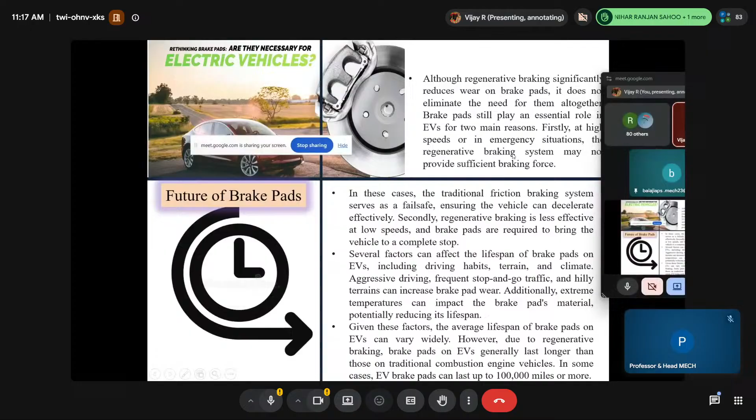I come to the conclusion on the final slide. I especially thank Dr. M. Selvam, HOD Mechanical, Dr. Aravind and Mr. Satish and the Mintech Multitech Mechanical team for giving me the opportunities and other things. And I should say clearly that this is all made only from my PhD and the postdoc research which is published, and some images are developed from ChatGPT.